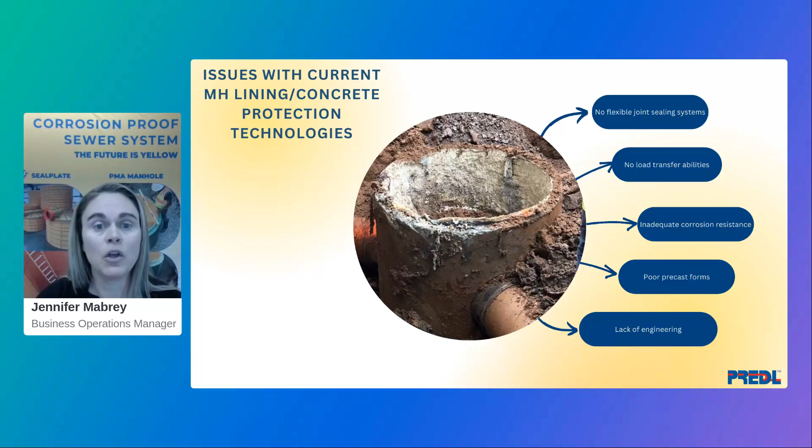Many of these issues exist due to a lack of engineering, which has ultimately led to the development of the PMA system. With the PMA system, PREDL's in-house team of engineers are engineering the underground. Many ask why this is important, and the answer is simple.

Currently, the number of manholes requiring rehabilitation and frequent maintenance in the US is quite high, in the range of 80%. And many of those manholes are less than 20 years old. In the 21st century, we should be capable of designing manholes that are meant to last 50 years, if not longer.

So often, I also hear concerns about the cost and people believing that there's no way a system like ours could be competitive or affordable. I'll be the first to say we may not have the cheapest product, but we're okay with that. We offer, however, competitive pricing, and when you consider the manhole in total, the pricing is good.

With this system, we can offer a design that's made to last over 80 years. So you should think about this. You put a manhole in the ground, and let's say it was new 10 years ago, but you've since had to rehab it twice with spray coatings.

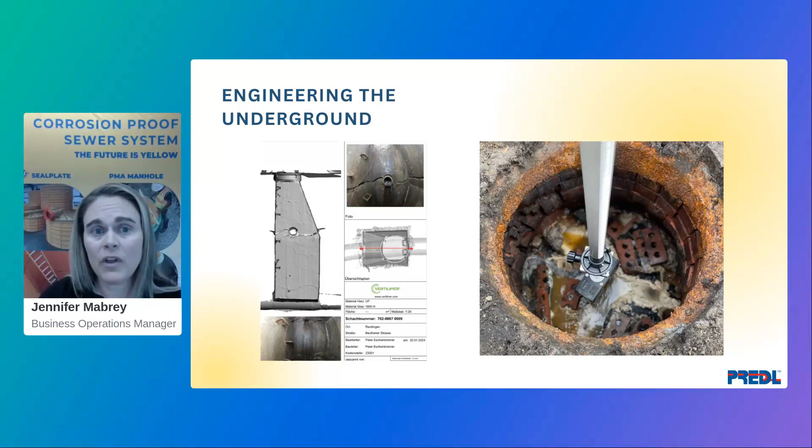So PMA can be used as a replacement manhole liner, as well as new construction.

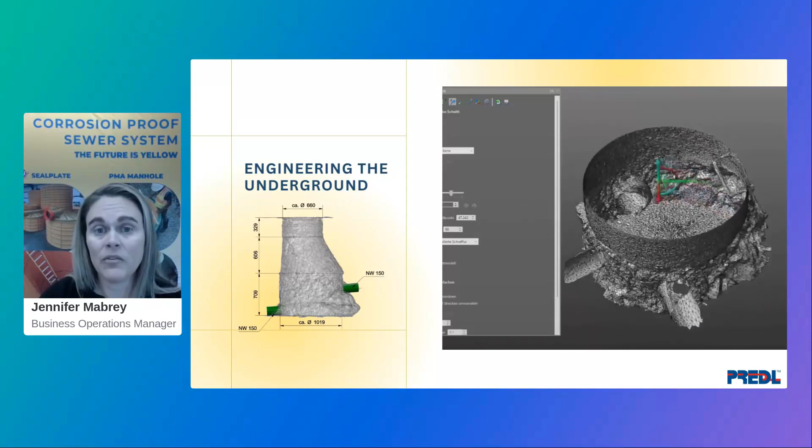Before designing a liner for replacement or rehab, we begin by digitizing the existing manhole via a 3D laser scan. We can see how much of the existing structure remains, as well as cracks in the structure, which could potentially impede the stability. From the scans, we produce drawings and 3D models of the existing structure, which we then provide to the customers and/or engineers.

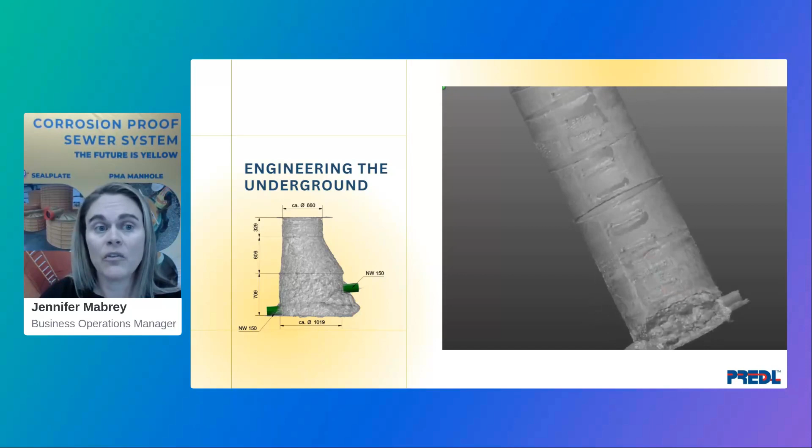This allows all to make an informed decision as to the safety and appropriateness of rehabbing versus replacing a structure. If all are in agreement that it is time to dig and replace, our engineered drawings are used to create the exact manhole needed to be able to reconnect to the existing connections.

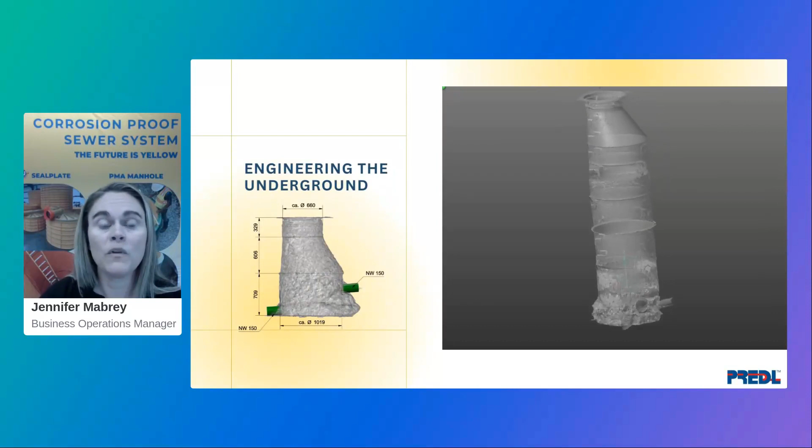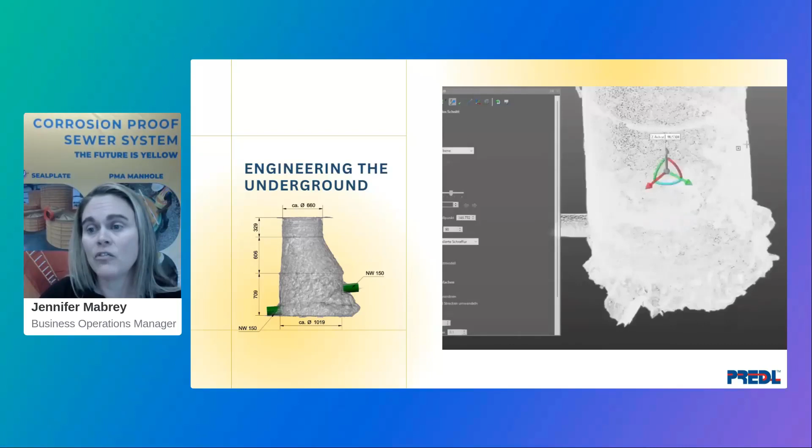Our team will work with the precaster and/or customer to ensure the liner meets all standards and can be cast without complication. This is not a one-size-fits-all approach. This is a thoughtful, engineered, and long-lasting solution. And the images you're seeing right now are those of projects that we've completed, scans we've completed, and the type of images that we generate through this process.

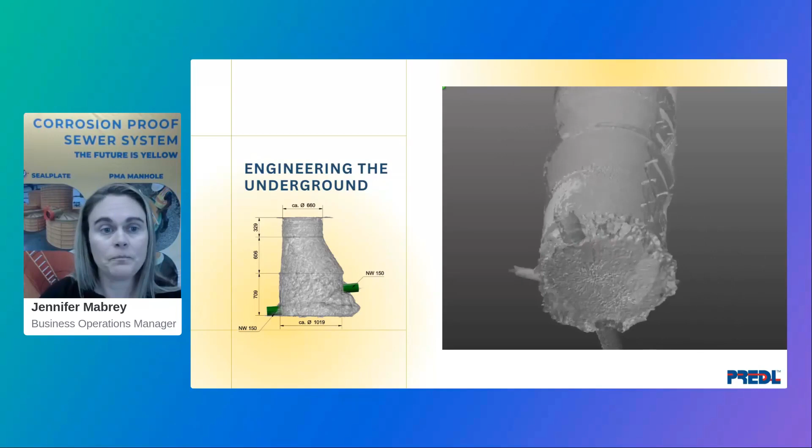Often I hear engineers advocating for spray liners, justifying it in a new manhole, saying that because it's low flow, the epoxy will be fine. This could be true in the current situation, but one thing we should always try to keep in mind is future development and the potential for other changes, which may create a more corrosive or turbulent environment.

With a subpar liner, you run the risk that a manhole will require replacement or rehab sooner than you'd like to see it done. To avoid this risk, the manhole should be properly protected from the highly corrosive environment within our sewer systems. The PMA manhole system is a supreme liner system, as well as a solution for new manholes.

When we use this system for new manholes, we're designing and building the liners to the specific needs of each structure. In this situation, we'll use the precaster shop drawings to design the liner elements. There are no adjustments to or assembly of parts required by the precaster or contractor once they've received our liner.

PREDL will work with the precasters and contractors on the installation and handling of the PMA elements. In most cases, our liners work with the precaster's current forms, and if for any reason they will not, we utilize the skills of our in-house engineers to help develop the best way to make modification recommendations.

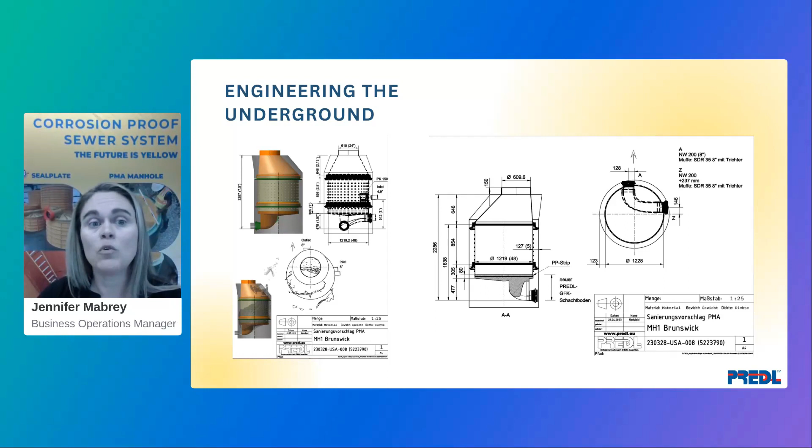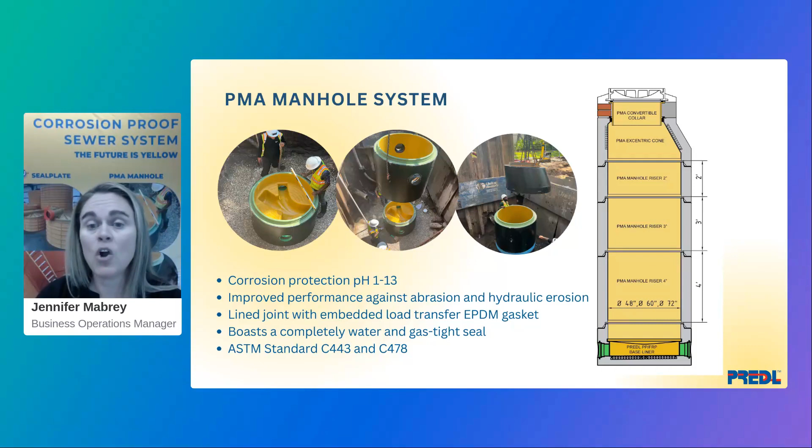Let's go ahead and review some of the overall key features and benefits of the PMA system. The PMA manhole system offers excellent corrosion protection in sanitary sewers. The materials are rated to last 80+ years, even in a highly turbulent and heavily used manhole.

The smooth and consistent hydraulics of the cast-in base liner ensure best hydraulics, drastically reducing the maintenance needs of that manhole.

Joint lining prevents infiltration and exfiltration, making it a great option for high water environments. Furthermore, the joint lining also ensures a gas-tight seal, offering the utmost protection of the underlying concrete.

With this system, we've eliminated the need for field welding, which decreases the amount of time a manhole must sit and wait to be completed, inspected, approved, and finally billed for. We've also eliminated the need for on-site contractors to have to deal with butyl or getting gaskets set.

The PMA manhole system conforms to ASTM standards C478 as well as C443.

Now we're going to go ahead and break down the various elements that make up the PMA manhole system. We'll start by discussing the PMA joint, which is really the star of this liner system.

In this picture, you can see precisely how the gasket is integrated into the female joint, and then how the female joint and the spigot come together to form that gas-tight, watertight seal.

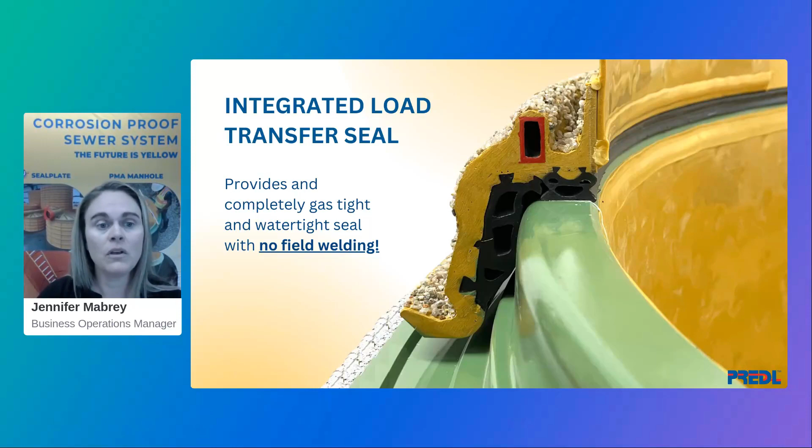During the patented protected manufacturing process, the EPDM gasket is embedded into the female joint. The gasket is responsible for providing the gas-tight, watertight seal, while also maintaining a flexible connection.

The flexible connection is extremely important because without it, we risk damaging the existing liner as well as leaking at the joints if the manhole's ever subjected to future ground movement.

Cap strips are not a flexible connection, and while butyl does provide some flexibility, it has the potential of not providing a watertight seal due to multiple factors.

The gasket also functions as a load transfer ring, which evenly distributes the load from the top of the manhole down to the ground. This reduces the incidence of manholes cracking under load.

Additionally, we have steel reinforcement rings throughout both the male and the female joint. We connect the joints to the polypropylene liner by extrusion welding the liner to a weld strip, which is also integrated into that joint system.

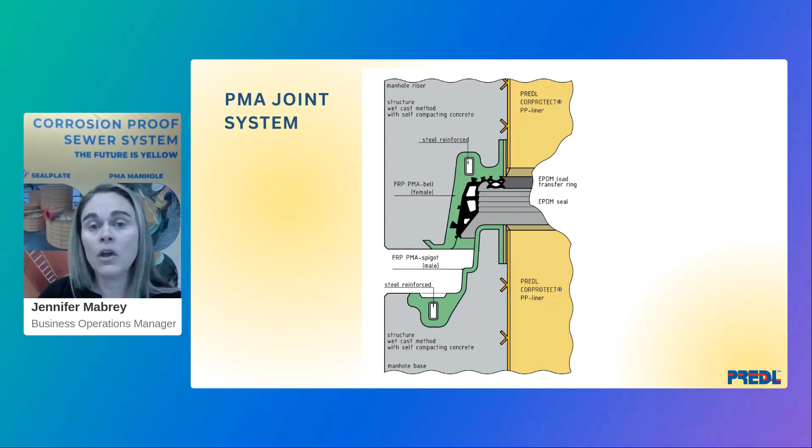The joints are connected to all elements of the manhole system. One important point I want to make on the precaster end of things is that we highly recommend only self-compacting concrete be used for casting these elements. It's important that all voids can be filled when casting the liners without the use of vibrators in the process.

So we utilize CorProtect to line the riser section of the PMA manhole. This liner is cut in-house via our CNC router to ensure that we have precise cuts, allowing the risers to be the exact diameter required. This is essential to work with the PMA joint system.

CorProtect is made of polypropylene, which boasts flexibility and stability in a wider variety of temperatures. The liner itself is 3 millimeters thick, with anchors that are 16 millimeters in height and spaced at 38 per square foot. All of this means we have a great pull-off strength of up to 2,000 newtons, and that's double that of comparable polyethylene liners.

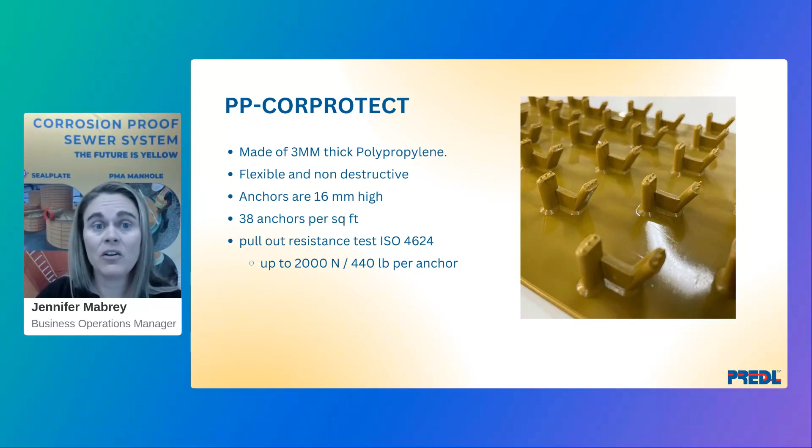And again, chemical resistance of this liner is superior for sewer systems, as is every component of this PMA system.

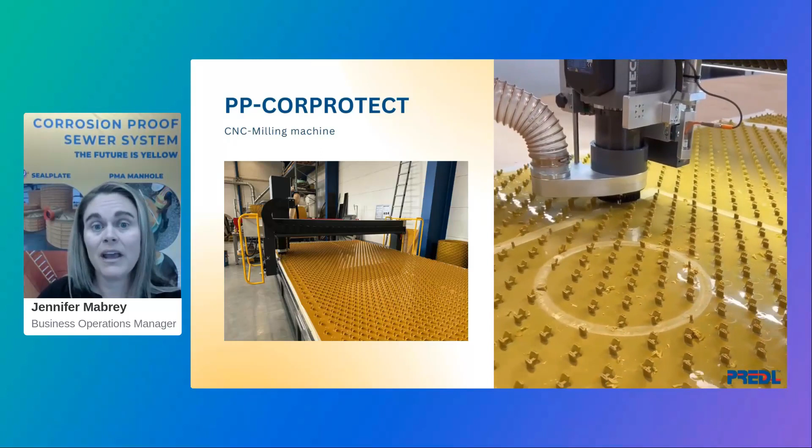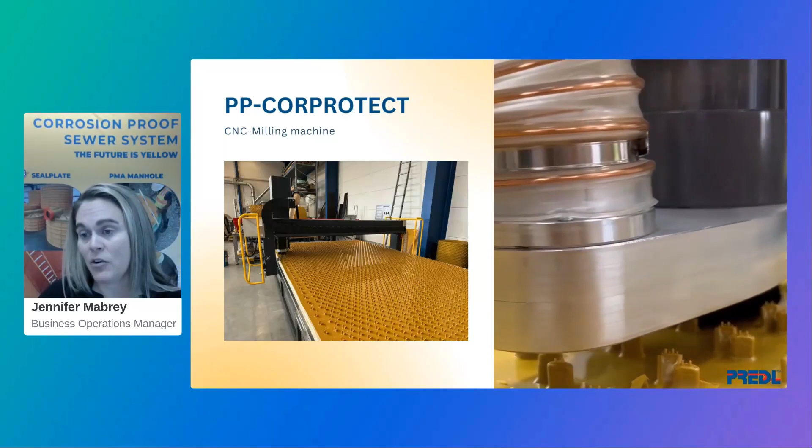Here, you're seeing how we utilize advanced technology to cut and weld the CorProtect riser sections. The CNC router is able to go in and shave off any of the anchors that are not needed for where we do the joint connection.

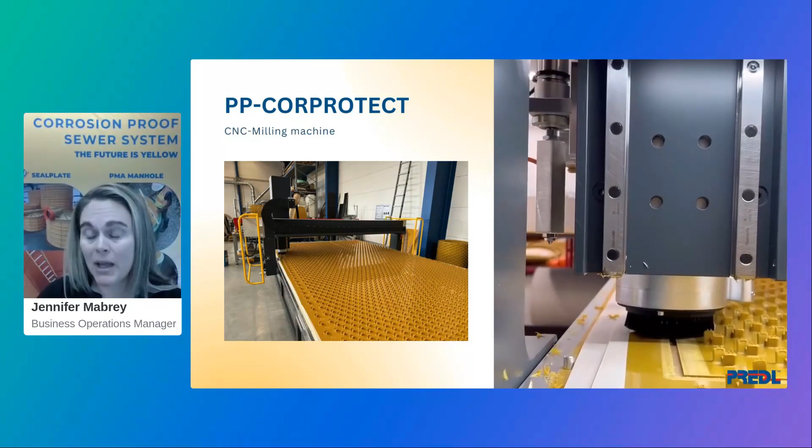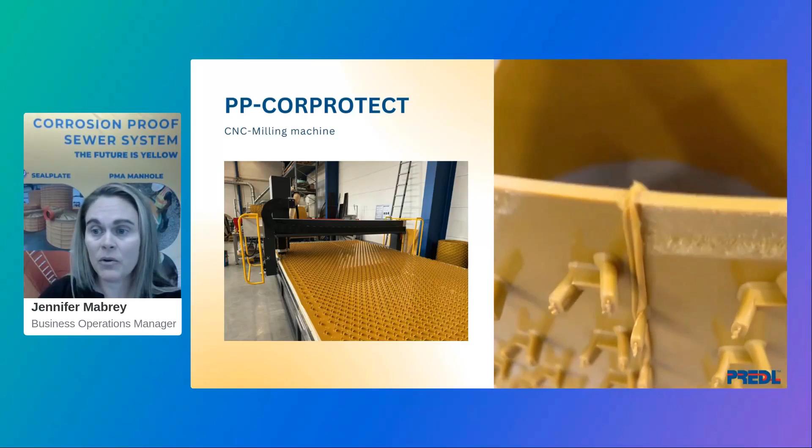They're going to cut exact holes for any incoming pipes we may have. And then our butt welder is going to handle the vertical welds, so we have a superior bond at that joint.

It's extremely important that these extrusion welds on the inside of the riser, where we're joining the joint and riser together, are consistent and low profile. We don't want to reduce the inside diameter of that riser at all. To do this, PREDL's designed a jig that we use exclusively in-house to assist with the extrusion welding process. I share this because I think these minute details really highlight how important each and every detail design of this system is.

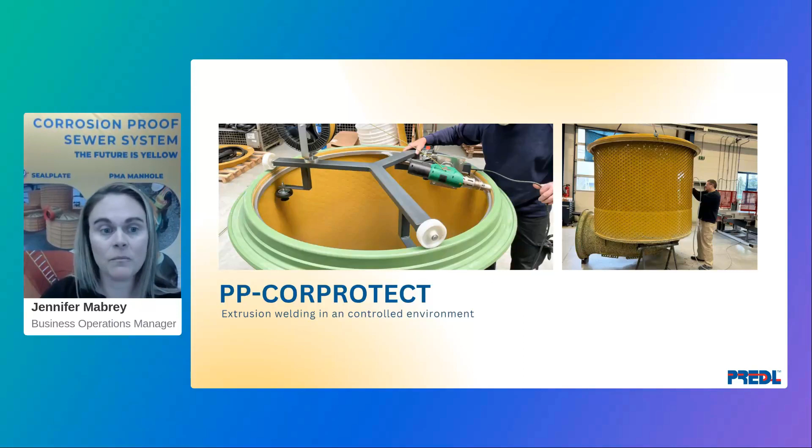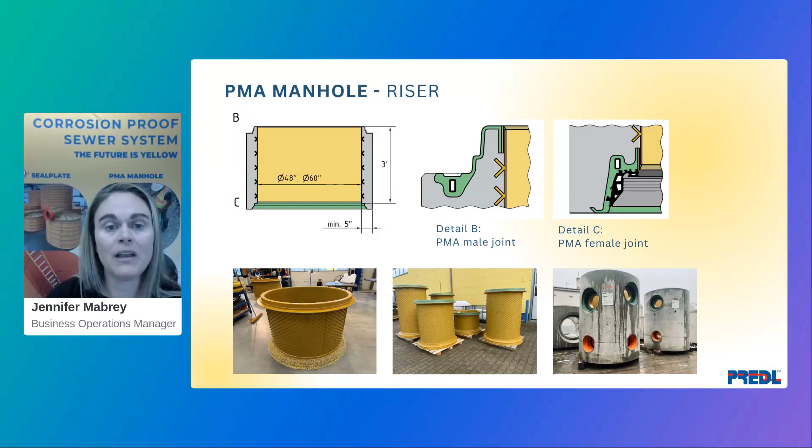Our PMA manhole risers are available in 48 and 60-inch diameter. Each riser comes with a male and female joint. We can build these to whatever height is required or requested.

Our PMA elements fit with the precaster's current forms without difficulty. Risers are cast with the spigot down so the SCC can get between the riser and the joint. And again, if there were any issues with the fit not being just right, we're going to assist with that process and utilize our in-house engineers if necessary to help. But in most cases, it works perfect.

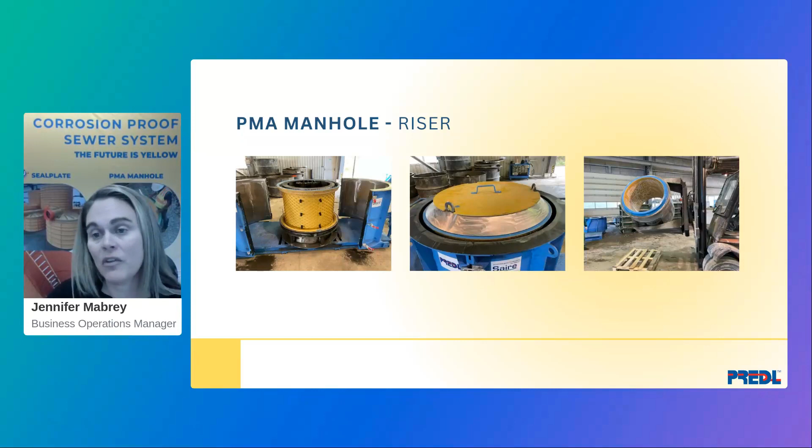PREDL's baseliners are vacuum molded out of corrosion-resistant polypropylene in most cases, and also produced out of our hybrid FRP when a non-standard baseliner is required. Either way, you're going to get a base with precise and smooth inverts, and this negates the need for hand benching as well as the inconsistencies that might come with that.

Furthermore, our baseliners are all outfit with bell connectors and the appropriate EPDM gasket to match the pipe connections. The bells serve as an easy way to securely connect incoming pipes while maintaining that all-important flexible connection. As you can see, we're capable of really creating not just the basic bells, but custom bells, as well as custom channel configurations.

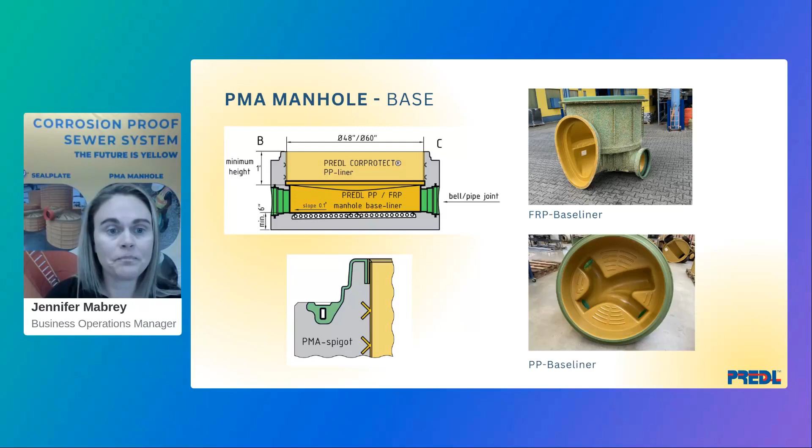Back of the baseliner is covered in aggregate as well as bonding bridges. This is going to help ensure a secure bond between the concrete and the liner. The inside of the liner offers anti-slip protection in the event someone must enter the manhole.

These baseliners are customizable to meet the need of any project. We stock a large variety of the most common configurations. Each baseliner comes with a standard 3-inch skirt. However, we can extend that to whatever size is required or preferred by the precaster. Any baseliner with a non-standard slope or a diameter greater than 48 inches would be produced out of our hybrid FRP.

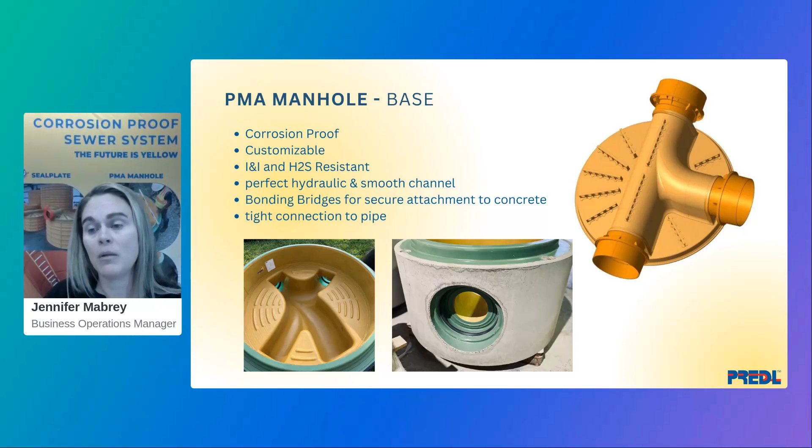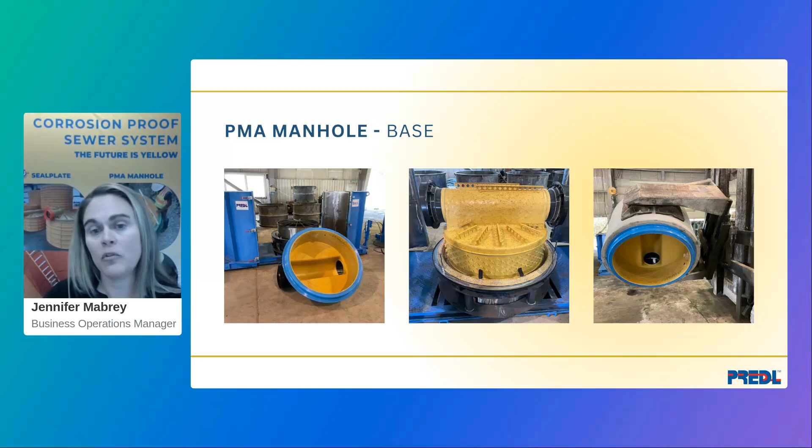The one thing you don't see in that picture is the support dome that we do provide to any new customers casting their bases. That sits on top of the inner core, and that is what helps to support the benching when the liner is being cast.

Each of the PMA manholes is complete with a cone or a flat top. As far as the cones, we offer a one-piece rotomolded cone that has an adjustable collar as well as a gasket. We also offer custom cone and flat tops, many of which can be built to size via the CNC router. All cones are fit with a female PMA joint, and this final piece added to the manhole ensures that you now have a fully lined, gas-tight, watertight manhole system.

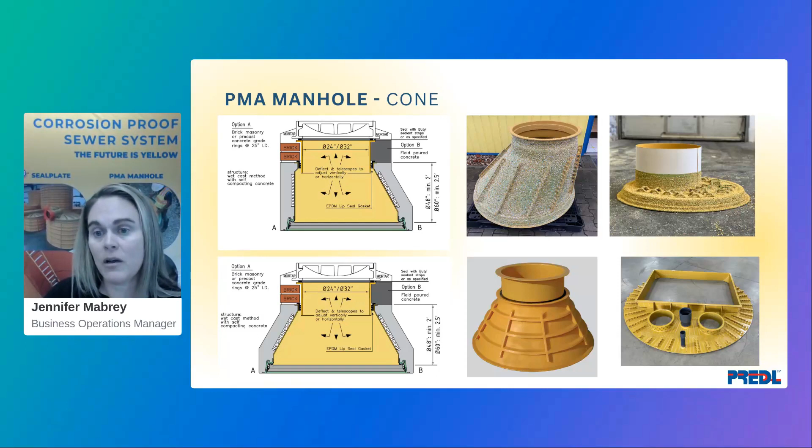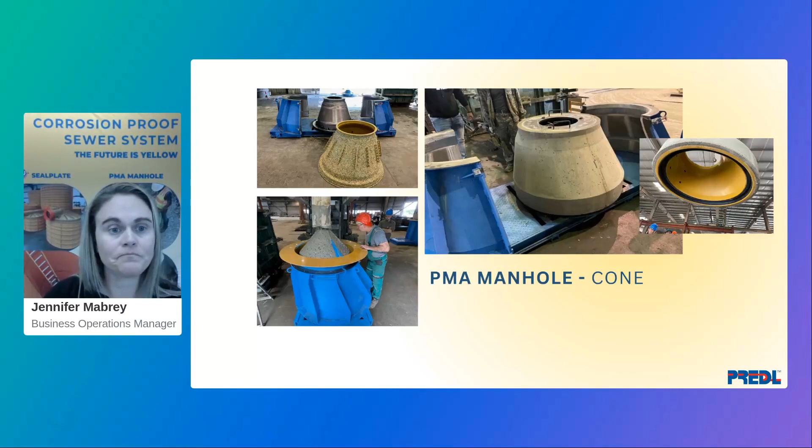I'd like to take a few minutes now to review a case study of a replacement manhole using the PMA system. Recently in Jacksonville, Florida, it was decided that a manhole was degraded beyond repair. This structure was in a high groundwater environment and plagued by significant corrosion, infiltration, exfiltration, and required frequent maintenance.

We began by scanning the existing manhole, and we developed engineered drawings of what we recommended building as the replacement. Once those drawings were approved by JEA, we worked with American Precast to ensure that they could cast the pieces as drawn. With the PO in hand, we prepared the liners and shipped those directly to the precaster.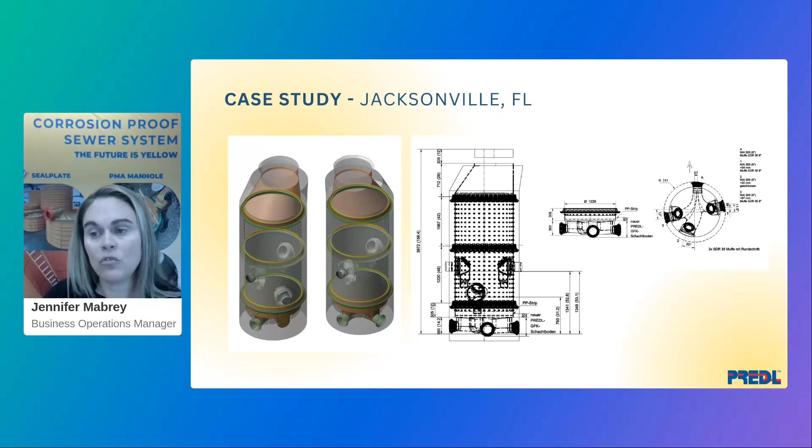Once all parts were cast and on site, we met with the construction crew to assist and provide guidance on installation of the manhole elements. We did so because this was a new contractor to working with us and the PMA manhole system.

They quickly recognized the ease of on-site installation. They only had to wipe the joints clean, apply a layer of pipe lubricant, and then nest the pieces together. They did not need to bother with butyl, trying to align joints, or getting loose gaskets in place, nor were they required to wait for anyone to show up to field weld the joints.

Once all elements were stacked and the various incoming pipes connected, JEA was left with a corrosion-resistant and practically maintenance-free manhole ready to last for many decades to come.

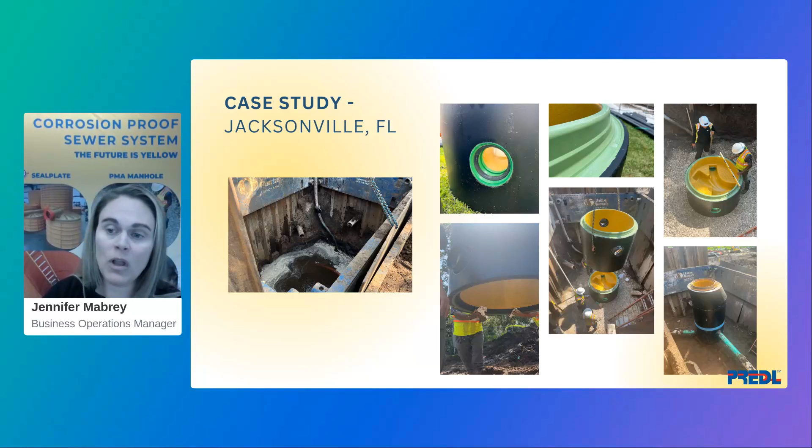Now we're going to show you a brief video that highlights this manhole from the production end to the installation end.